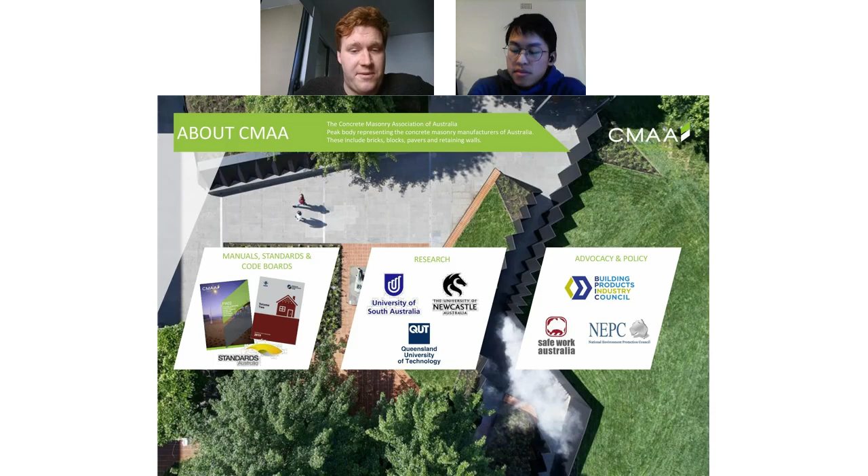We conduct research with numerous universities around the country to facilitate improvement in design and construction within the concrete masonry sphere. And obviously, we advocate for positive change within the industry. So our strategic vision here at the CMAA is to make it easier to build in block and pavers. We have sort of a three-pronged approach to do this.

So we want to develop talent in the industry. So this is obviously through educating our engineers and designers. We want to facilitate important conversations within the industry. So we want to, again, as I mentioned, promote positive collaboration within different spheres and promote healthy conversation within the industry. And lastly, obviously, we represent our members. So we like to promote our members' products as well and make sure that they're used in the correct and proper manner.

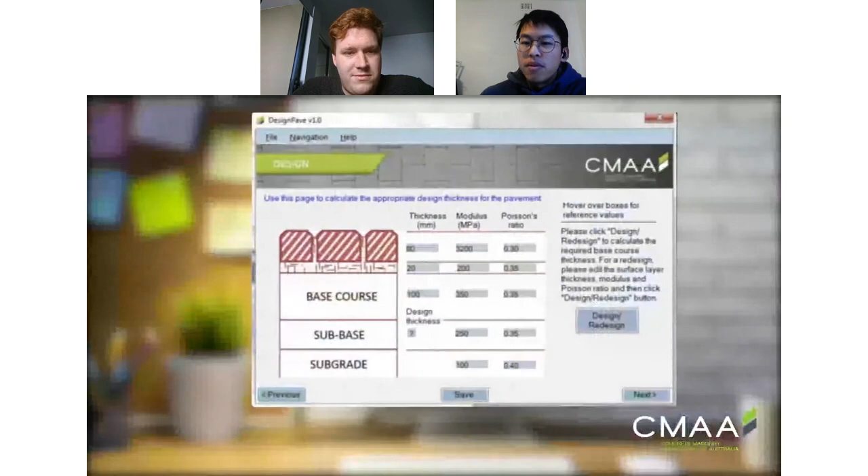And projects your council is interested in with regards to concrete masonry. We also offer our Approved Installer program, which provides training for engineers and paver installers in segmental pavements. Whether they're in-house or subcontractors, the Approved Installer program can help avoid product failure, optimize construction methodologies, and minimize maintenance issues for all matters related to concrete blocks and pavers.

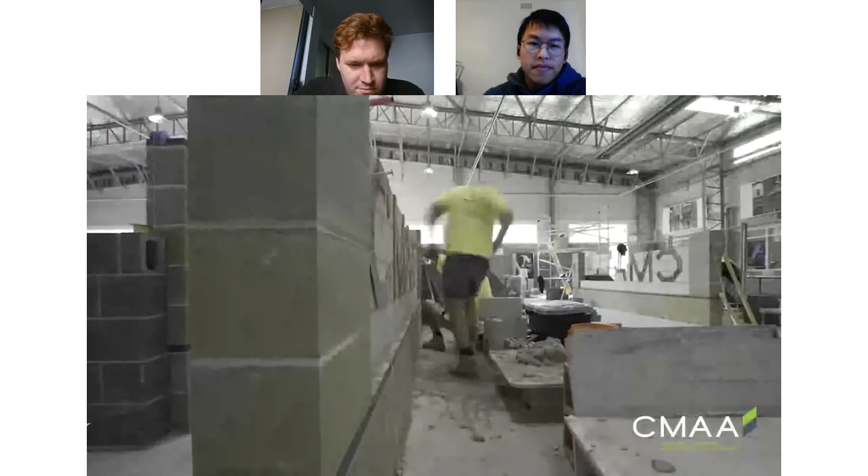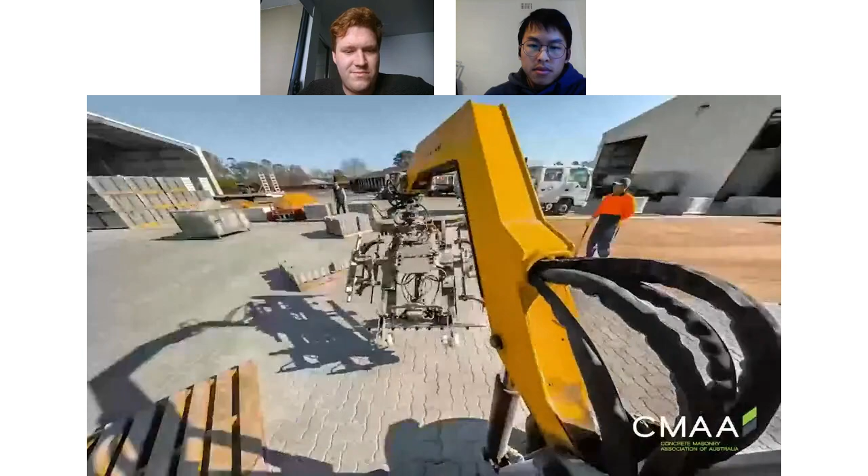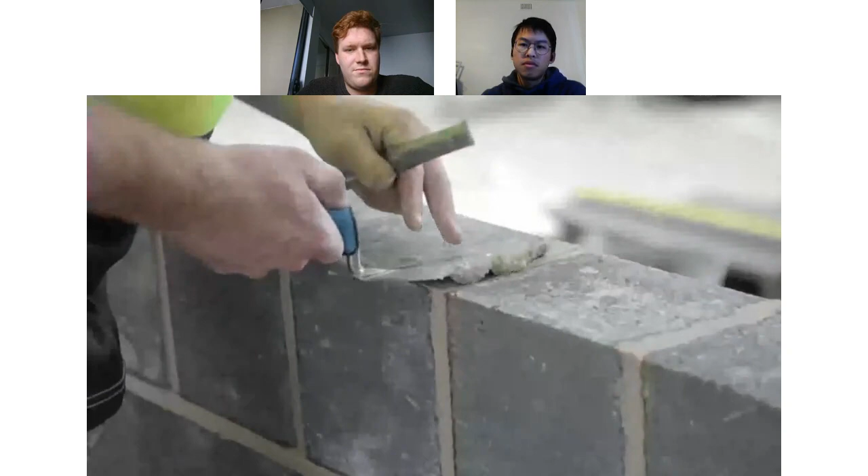Concrete Masonry Association of Australia is an industry association representing concrete masonry manufacturers. Our mission is to make it easier to build with concrete blocks and pavers, which is why we offer all of our services and resources on a complimentary basis to councils. These include our technical services, industry-recognised pavement design software, technical resources, industry networking, technical committees, and our training courses. Our engineers frequently work with masonry products and offer their technical design services to help you effectively manage your projects. We offer industry-leading software tools such as DesignPave and PermPave, which assist engineers and landscape architects in pavement design, alongside live webinars and in-person workshops where we demonstrate how to use the software.

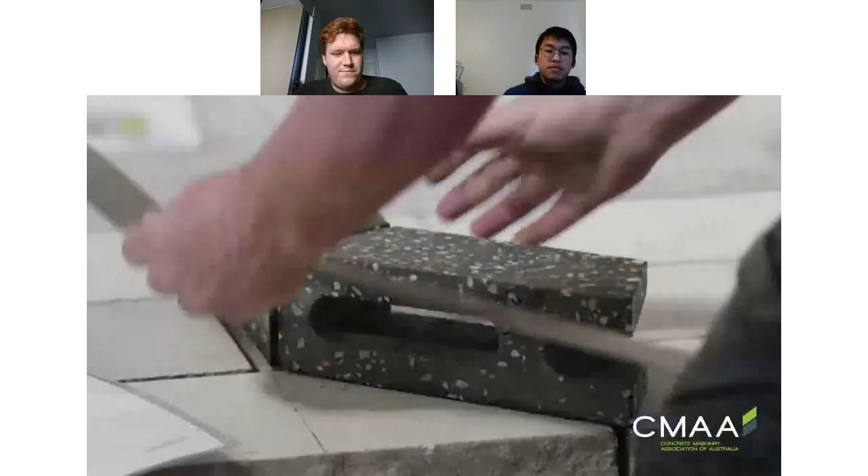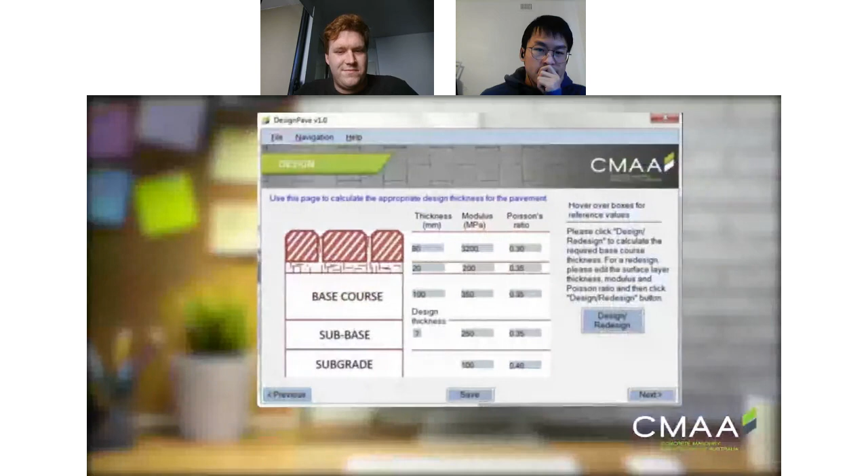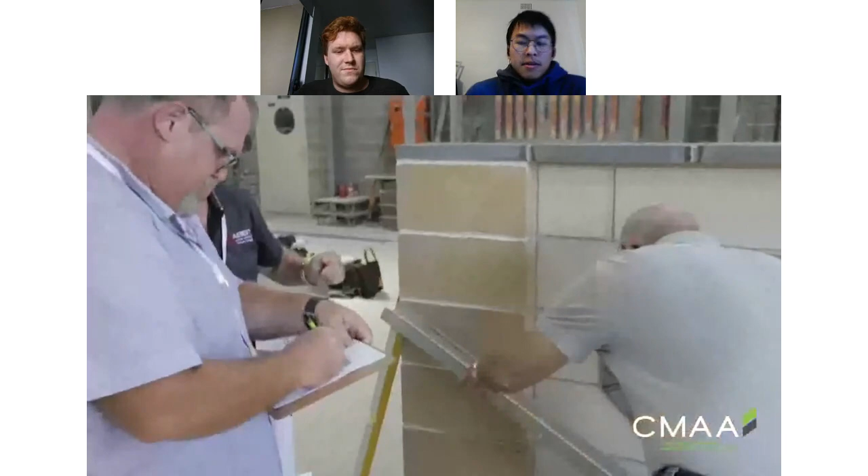We have a range of technical manuals and fact sheets easily accessible from our website to guide your engineers when working with concrete masonry. We facilitate opportunities for you to get in touch with our network of industry members whenever you need to sample their products or receive technical guidance. Another valuable resource is CMAA's Technical Committee, which is comprised of experienced industry practitioners who can discuss any issue in the industry and projects your council is interested in with regards to concrete masonry. We also offer our Approved Installer program, which provides training for engineers and paver installers in segmental pavements. Whether they're in-house or subcontractors, the Approved Installer program can help avoid product failure, optimize construction methodologies, and minimize maintenance issues for all matters related to concrete blocks and pavers. Your trusted source of information is the Concrete Masonry Association of Australia. Our mission is to inform, educate, and provide guidance along the way for councils on a consistent basis. Give us a call today and keep thinking pavers.

In conclusion, I hope everyone enjoyed the video, but I think it sums up what we're about and what you can get out of the Concrete Masonry Association. So again, feel free to ask questions, anything you want to know, we're here to help you out.

So today we're going to go through a little bit about what water-sensitive urban design is in Australia and how we might achieve this. Then we're going to touch a little bit on permeable concrete interlocking pavers, as well as some of their benefits and their applications. Then Jim's going to run through some policies and market development and how this might apply, particularly if you're working in a local government sphere. And then lastly, we're going to touch on some further opportunities, not only for permeable pavements, but also for your concrete segmental pavements in general. And this is going to flow into future episodes of our webinar series as well.

So I might palm off to Jim, and he might take you through a little bit about water-sensitive urban design in Australia. Yeah, thanks, Jack. So to start off this webinar, let's firstly look at what exactly is water-sensitive urban design. We all know that governments, whether it's your local, state, or federal government, they tend to be big on sustainability, not just environmental sustainability, but also social and economic sustainability. And this is essentially what water-sensitive urban design is all about.

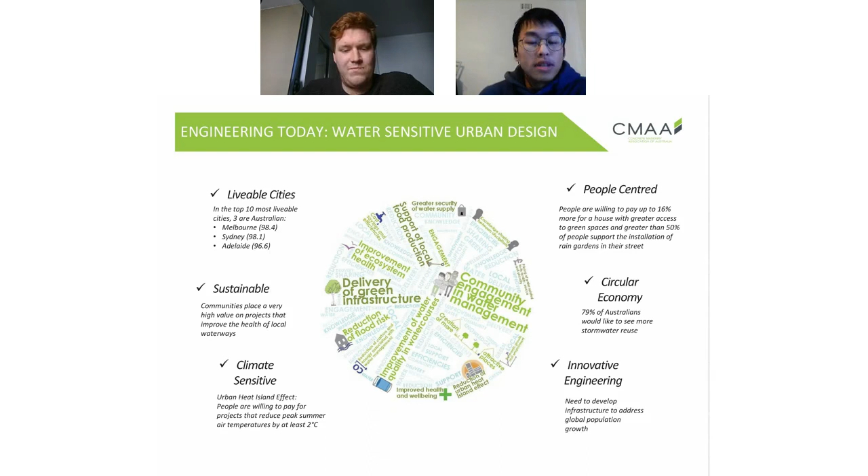One of the big reasons why we need water-sensitive urban design is population growth. Currently, we have a population that is larger than ever recorded and will continue to grow in the coming years and decades, right? And this is going to be a big problem in the 21st century: whether we can provide enough resources to everybody living here.

And this is not unique to water. This also applies to food, to energy. But for today, obviously, we'll only talk about water. Just throwing some quick facts your way. 90% of Australians actually live in urban areas, and 80% of population growth will actually occur in Australia's 5 biggest cities: Sydney, Melbourne, Brisbane, Perth, and Adelaide.

When we think about how we have these densely populated urban centers, the issue not only becomes whether we can provide enough water for all these people, but also whether we have the infrastructure that can help us adequately and sustainably deliver large amounts of water to people living in densely packed places, right? So that's a big issue.

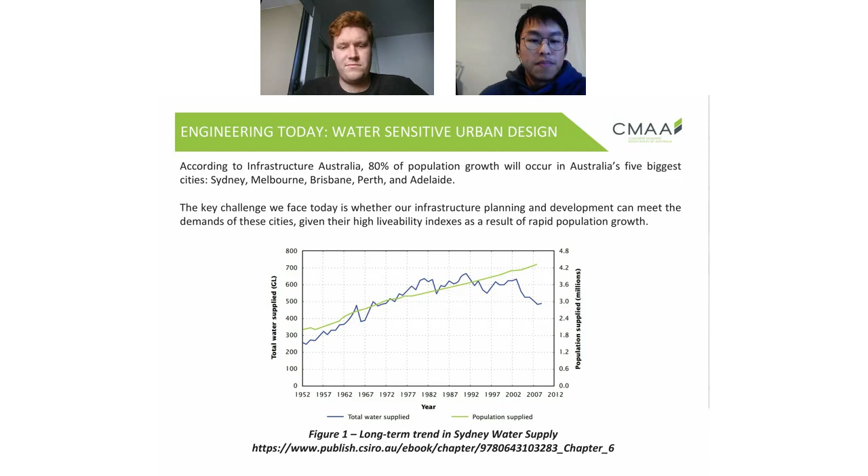Another issue that comes with urbanization and us living in urban areas is the stormwater generated from impermeable surfaces. So to give you an idea of what I'm talking about, when we're out in the countryside, when a big storm comes through and it rains, a lot of that water gets absorbed by the ground. 95% of it gets absorbed by the ground.

When we're in a town or a city where there's a lot of infrastructure, where you have a lot of roads, a lot of buildings with roofs, all these surfaces that prevent water from entering the earth ultimately generate stormwater runoff, right? All this runoff is going to be directed to a drain somewhere down the road.

When you have all this water directed into a small pipe, you're going to have two options. You're going to have to spend a lot of money making a lot of drains, or you're not going to spend enough money, and your areas are going to flood. So this is a big issue that's come from urban areas as well: the large amount of stormwater runoff that's been generated.

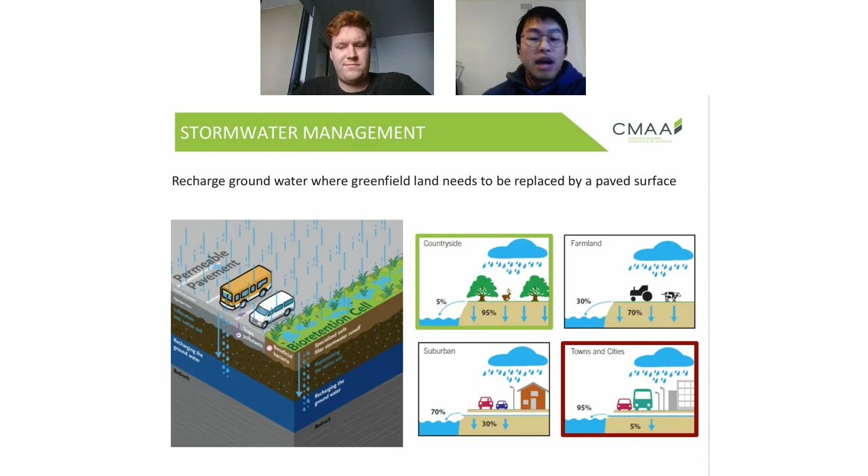And here's just an example of what you might see, right? When you have large areas of impermeability, when water can't get through to the ground.

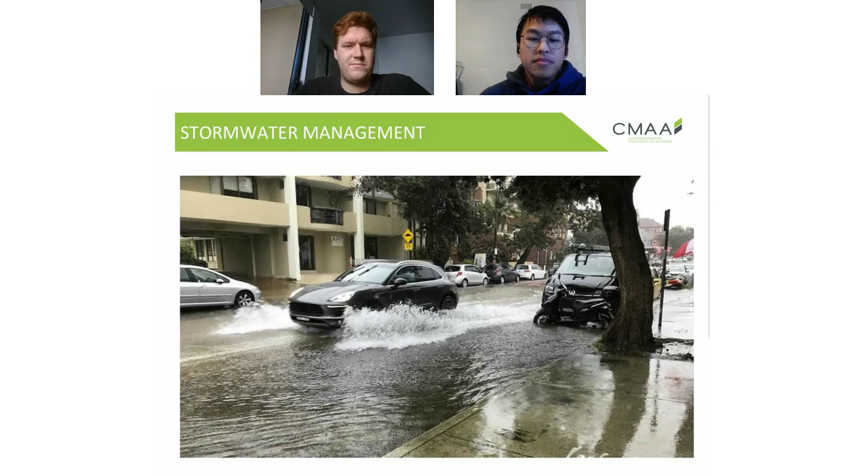Another point I want to make on why water-sensitive urban design is so important, especially in Australia, is because of our climate and our environment. A lot of you probably already know, Australia is known for being vulnerable to droughts. We're a drought-vulnerable country. With droughts, we also become vulnerable to bushfires, which we saw earlier last year. These droughts are a natural product of how our climate doesn't have a lot of rainfall, or at least it has long periods of time without rainfall.

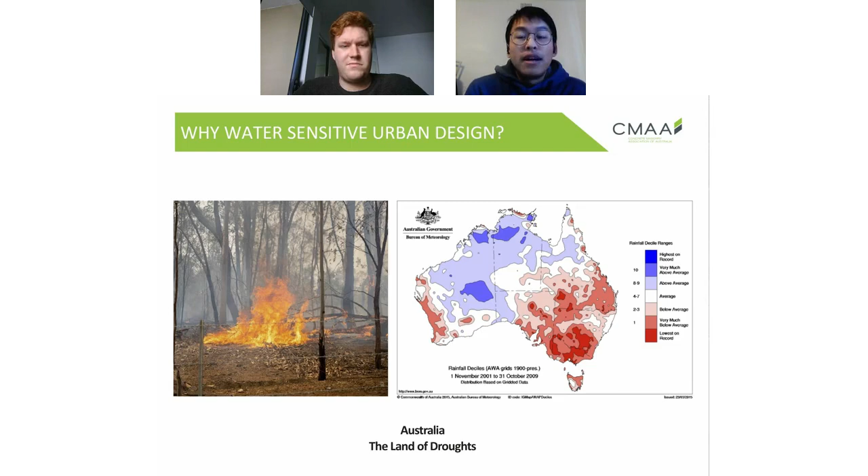But what people sometimes forget is that we're also vulnerable to floods, right? In Australia, we tend to have long periods of dryness, of no rainfall, but we also have short, intense periods of rainfall when they do come. These short, intense storms ultimately cause floods, which we commonly see in Australia, in Queensland, and more recently, earlier this year, in Sydney.

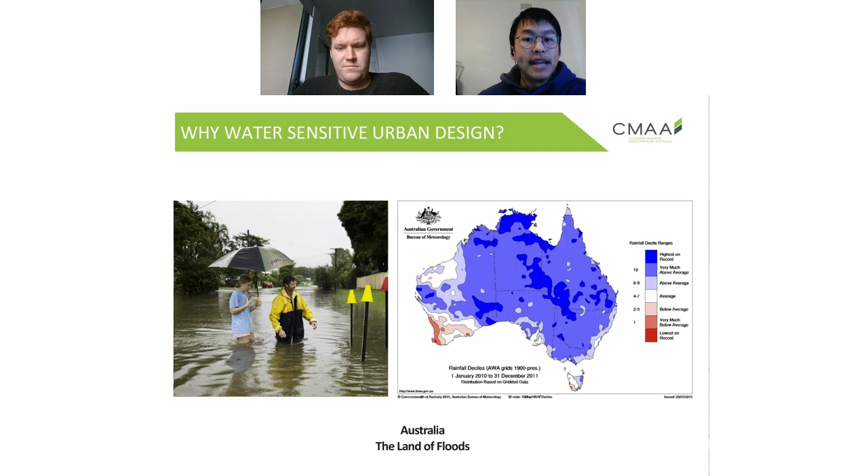So understanding that we're a country that's vulnerable to both sides of the spectrum in terms of extreme events, we really do have to start thinking more intelligently about how we're managing stormwater and how we're building our infrastructure, right? And what the science is telling us is that these extreme events will only become more frequent with climate change.

So as engineers, designers and planners, we need to start thinking about how we are going to build the infrastructure to make sure that we're going to be okay, not just when we don't have enough water, but also when we have too much water. That's going to be a big challenge, and that's something we're going to have to put a lot of brain power towards.

But I'm going to hand off to Jack now. What I've told you is a lot of problems, and Jack's going to talk to you about what solutions might be available. Yeah, so thank you, Jim. So in terms of how we might go about looking towards water-sensitive urban design and some solutions to achieve water-sensitive urban design, what we'd like to specifically focus on today at the CMAA is talking about permeable pavements.

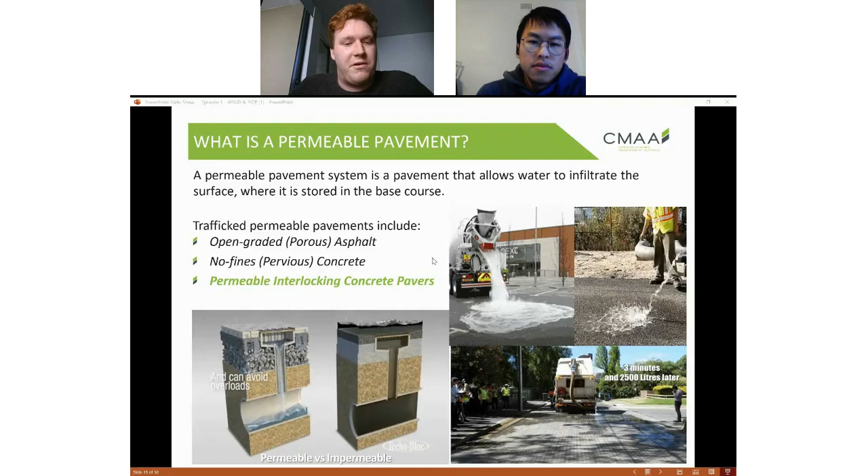So often when we think about water-sensitive urban design and how we might control water, often the conversation steers towards drainage systems, and it steers towards how big our pipes need to be and how large and frequent our drains need to be designed for. But what's often less considered is how the pavement surface itself might react. So today we invite you all to consider looking at the pavement surface itself as a potential solution for water-sensitive urban design, particularly at a local government area.

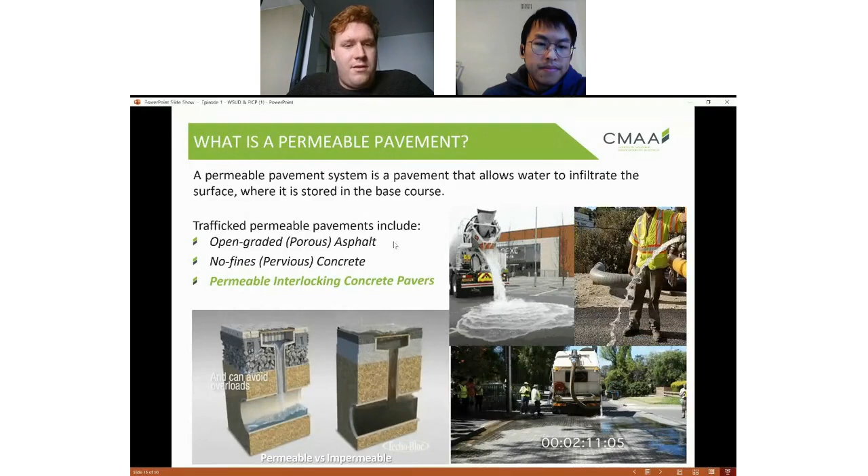So again, what is a permeable concrete interlocking segmental pavement? So essentially, this is going to be a pavement where, as I mentioned, you have small pre-cracked pavers or individual pavers, which will have either widened gaps, as you can see on the left, or actual joints on the right, which will allow water to pass through. Now, the main advantage of these systems in comparison to your no fines concrete and your permeable asphalt is that there's less risk of clogging with these types of pavements.

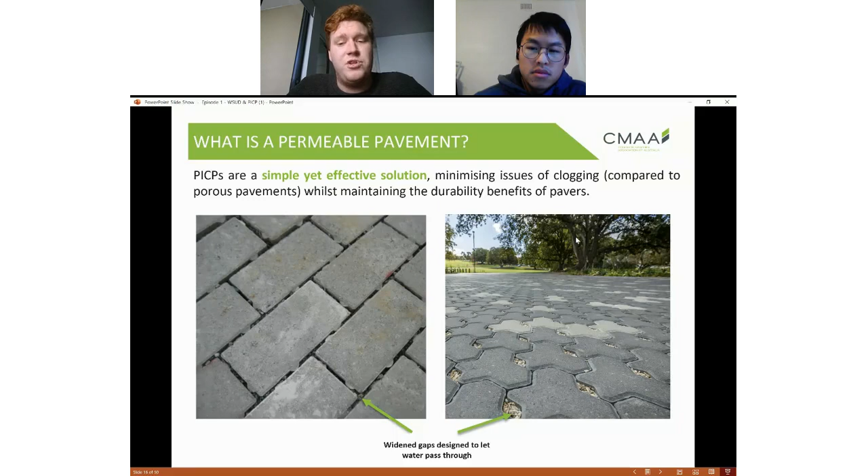As I mentioned before, these permeable interlocking concrete pavers come pre-cracked. What I mean by that is they're obviously in smaller unit sizes than what you might see in your sort of concrete footpaths or bitumen road surfaces. And what this essentially means is that they're less likely to crack on a larger basis than what these other pavement systems will experience over their lifetime.

And a very clear example that everyone here is probably familiar with is looking at a concrete pavement around trees or looking at an older concrete pavement. And all too often, you're going to see these systems have large cracks and large uplifts. And obviously that becomes a huge issue from a maintenance perspective.

Now, again, in the event that these high durable pavers do fail or do crack, it's super easy to replace them. It's a simple matter of lifting the individual paver up and simply replacing it with another paver. Boom, job's done. Again, these pavements are environmentally friendly. So I'll go into a little bit more of the benefits from a water resources perspective in a minute. But it's important to remember that these pavers can actually be recycled at the end of their lifespan.

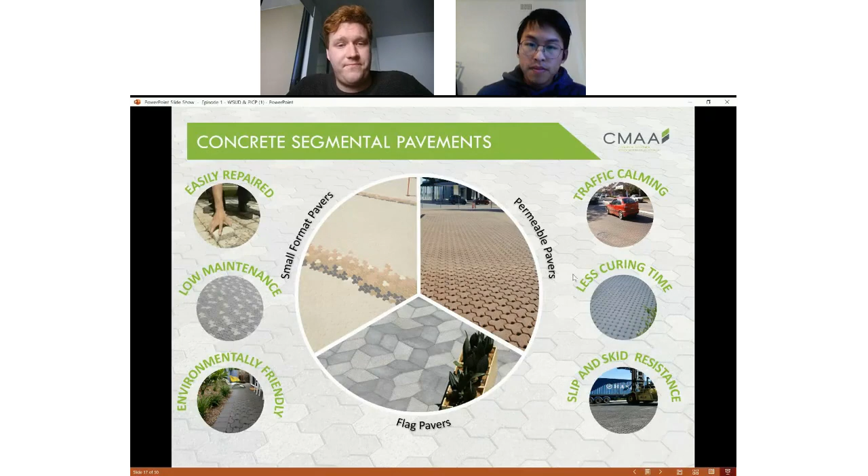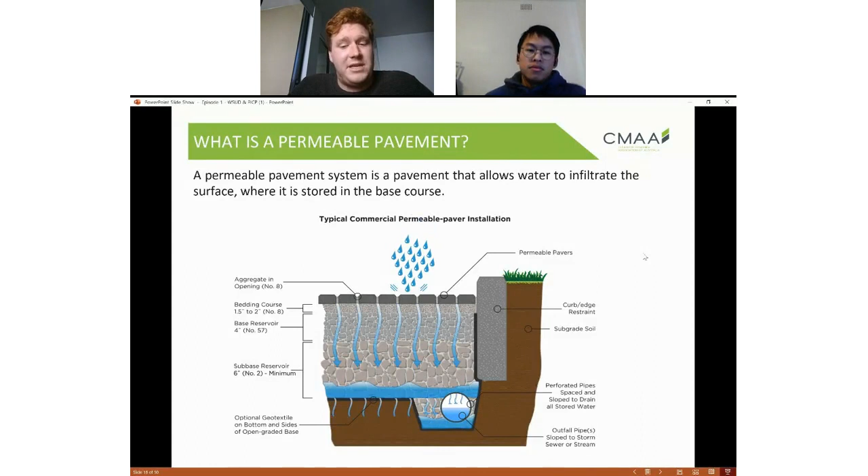But now looking towards specifically how a concrete interlocking permeable pavement system might work. So you can see here in this GIF, the way it works is that rainfall will hit the surface of the pavement and it will actively travel through either the widened joints or the porous pavers themselves. And it will travel through the permeable base course and the permeable bedding course, and run through the system to be stored underneath the pavers. So this water that's infiltrated our system can then either be allowed to go back into the underlying subgrade, or it can be pumped out and reused for whatever reuse water application you might have.

Now, as humans, we're quite arrogant when it comes to urban design, and we like to control our environment and create controlled urban designs and urban situations. However, permeable pavements break the number one rule of pavement design, which is to never let water penetrate the wearing surface of your pavement. And so the ideology here is to work with nature and work with rainfall and allow it to actively flow through the surface as it would in a non-urban situation.

Now, we often hear concerns about water infiltrating the surface of your pavement. And this is often because engineers are concerned that when water gets underneath the pavement, it's going to create a pumping effect whereby a lot of the fines in the underlying base course are removed through the erosive force of water. However, if we think about how we can design these pavements, we can actively combat this situation.

And so remembering that urban traffic is extremely destructive, that water can be a powerful eroding force, and that having a saturated pavement alters the material properties, we can try and think of some solutions to combat these to create our permeable pavement system. And what we end up with is a no fines base course, which will allow water to filter vertically through the base course whilst not having that erosive force that you would otherwise experience with an impervious surface. So by acknowledging these potential flaws and addressing them, we can have a pavement that will perform both structurally and hydrologically.

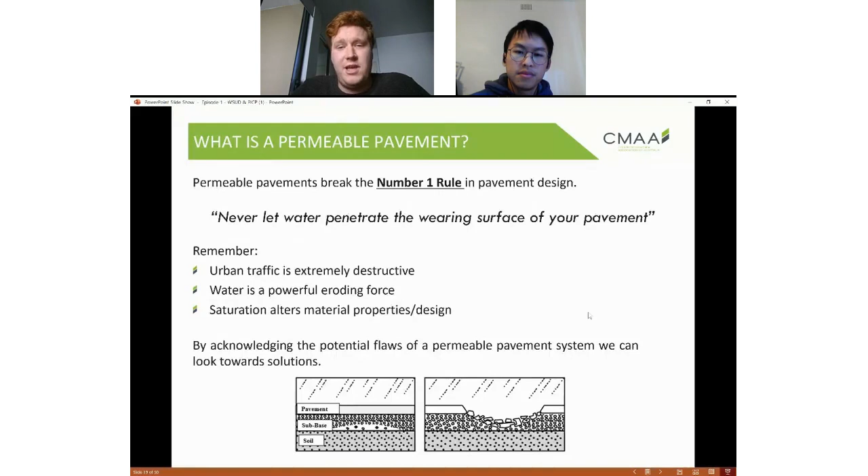So how do these work? In terms of benefits and systems for permeable pavements, there's three main systems that you might want to consider with your hydrological design. The first is runoff control. As I mentioned before, permeable pavements are going to allow water and rainfall to infiltrate the surface. And you can see here through these two little GIFs how impervious pavements versus permeable pavements might work.

In an original situation with your typical impervious pavement, your rainfall would hit the surface, flow into a drain or a pit, and flow through the stormwater system. Essentially the inflow would be equal to the outflow immediately throughout the duration of that storm. What a permeable pavement aims to do is extend that hydrograph. You can see here on the bottom left the idea of having a permissible discharge in your system, or having certain infrastructure to allow a certain discharge.

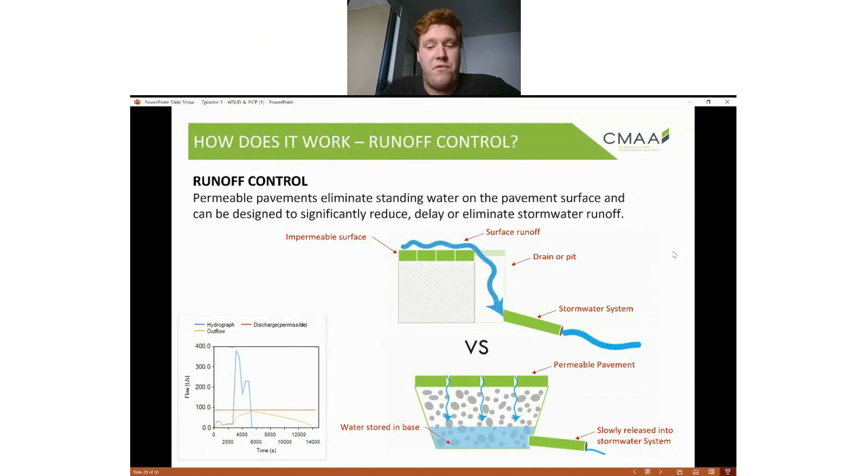The aim of these permeable pavements is to store that water over a longer period of time so that your outflow doesn't go higher than your discharge. In layman's terms, this means that you won't have flooding in your system because you will have the capacity to store, mitigate and remove this stormwater slowly.

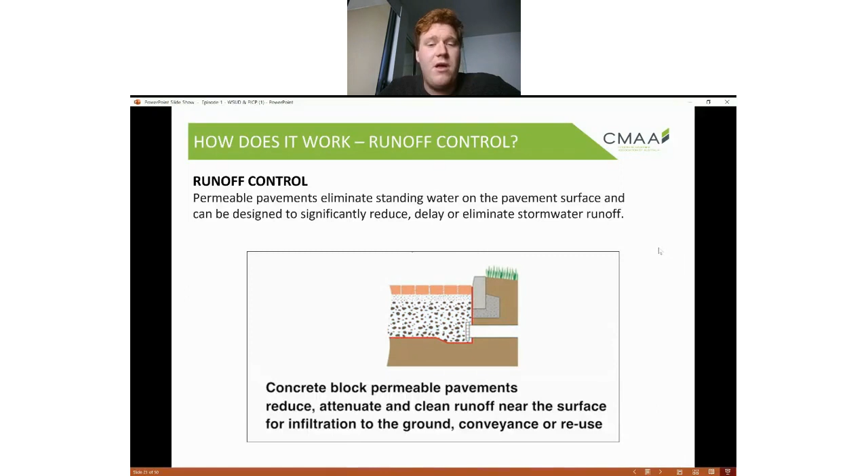And again, you can see how this works in this video as well. You can see rainfall slowly infiltrating the pavement surface and filling up in the base course, where it is slowly released either through a pipe or into the underlying subgrade. What this means is that you won't get standing water on your pavement surface. The photo that Jim showed before of the road being flooded from heavy rainfall, with a permeable pavement system, you won't get that.

Now, the second main benefit for permeable pavements and a secondary system requirement that you might consider is water quality improvement. What do I mean by this? When water hits our pavement surface, it's going to take with it all of the pollutants on that surface, including phosphates, nitrates, and suspended solids. A permeable pavement will actively filter out these pollutants. It's quite simple in theory: it's essentially gravity-fed mechanical filtration.

The water will enter the pavement through the gaps that I mentioned before. As it bounces around and hits the aggregate within the bedding course and the base course, those pollutants will stick to the aggregates and get filtered out as the rainfall infiltrates downwards. So you get a stone reservoir mechanical filtration system, whereby your phosphates, nitrates, and suspended solids are stored in the bedding course and the base course, and clean water is released at the bottom of your pavement system.

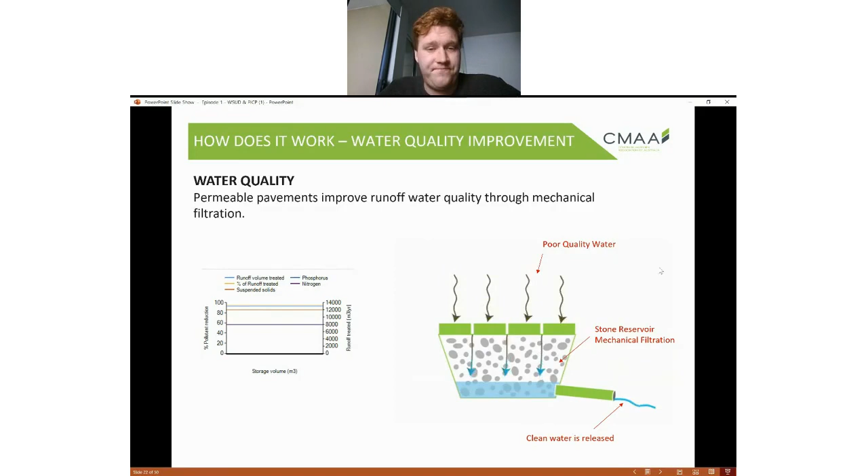Lastly, we've got water harvesting as something you might want to consider with regard to water-sensitive urban design and the design of permeable pavements. As I mentioned before, water can be stored in the base course of these pavements. Seems pretty simple. You can design your base course to be large enough in volume to store a certain amount of water, depending on your climate zone, how much rainfall you receive, and how much rainfall you want to reuse for later applications.

A great example of this is having a permeable pavement in a car park for a sports oval, because you can capture all of the rainfall that hits the surface of this car park and use this water to water the grounds of the oval. From a local government standpoint, this is great because it means that you don't have to pay for water to irrigate these areas.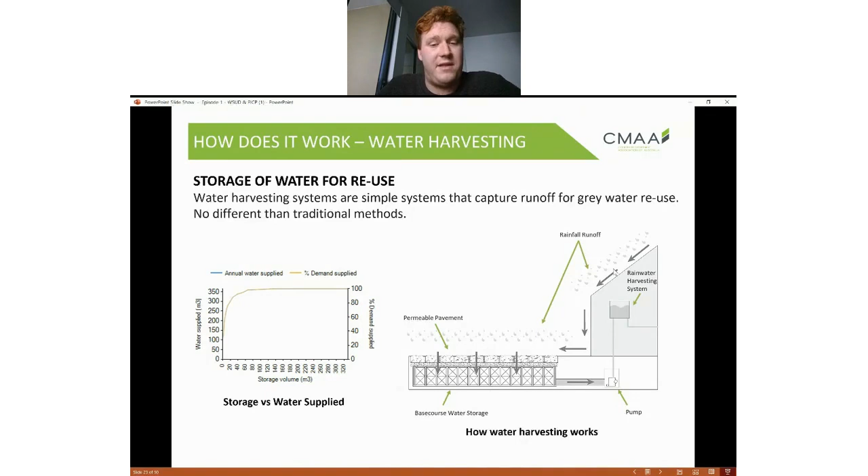So to sum up some of the main systems and some of the main applications of permeable pavement systems, obviously from a water-sensitive urban design and sustainability standpoint, we can look at flood control. These pavers are going to mitigate the risk of flooding as they will store water in the base course. Additionally, the stored water in the base course can be reused, meaning that it's not going to waste. And you're also improving your water quality as well, meaning that pollutants aren't going to make their way into the stormwater system in the first place.

Now, if we're talking about economic benefits as well, you don't actually have to put drainage infrastructure into a lot of your permeable pavement systems, particularly if you're going to let the water infiltrate slowly into the underlying base course. You don't even need a pipe, you don't even need a pump for this water, which actually minimizes the need to design and construct drains and pipes.

Again, property protection: minimizing the risk of flood means that properties are often safer, and you're going to be maximizing your land use and how sustainable your area is going to be with these permeable pavements. So in short, combining all of these benefits, it's realistically a multifunctional, holistic pavement solution that you're going to be able to employ, particularly to reach those targets for water-sensitive urban design.

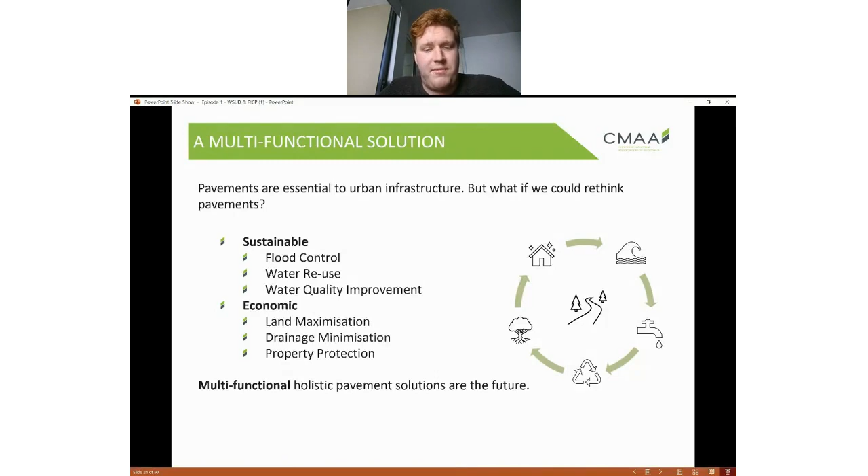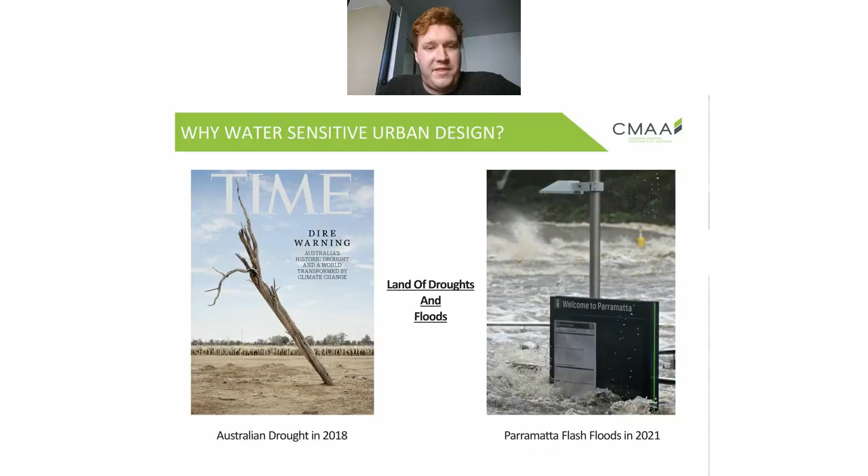So I think I might hand over to Jim now, and he might go through some of the benefits of using our DesignPave and PermPave program. I think we no longer need the GIFs, so we're going to switch back to regular slides on Demio now. I'll let you take it from here, Jim. Yeah, let me just fast forward.

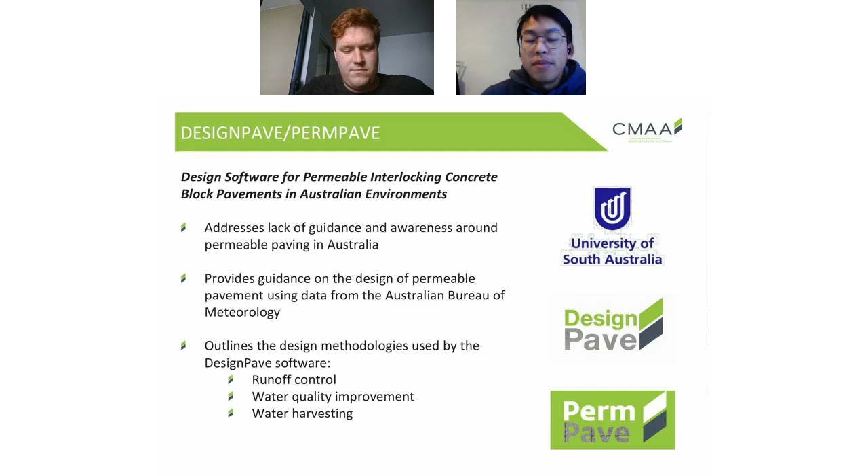So if you're wondering how exactly you would design a permeable pavement, we've got you covered, because we here at the CMAA, in partnership with the University of South Australia, have actually developed a software program to help you do exactly this. These are the DesignPave and PermPave programs, DesignPave being the structural part of the program, and PermPave being the hydrological side. DesignPave and PermPave is quite unique in that it's the only program in the world for permeable interlocking pavers.

I'm just going to give you a quick rundown as to how the program works. The point of today is not to overburden you with a lot of technical information, but to give you a high-level understanding of what exactly permeable paving is and why water-sensitive urban design is important. So to put it in really simple terms, we're going to use the bucket analogy. That's all a permeable pavement is. It's just a fancy bucket with a hole at the bottom, right?

So when a big storm comes through, instead of your stormwater system instantaneously being subjected to a high amount of water, what you have is a temporary water storage solution to hold that water and, over a longer period of time, release it at a constant flow that you as the designer have specified.

Your pavement can be modified in all sorts of ways: through changing your paver type, your base course material, or the subgrade you're actually building on. And you can change and customize all these inputs in the program. That's essentially changing how big your bucket is, how deep your bucket is, or how big the hole is at the bottom of your bucket.

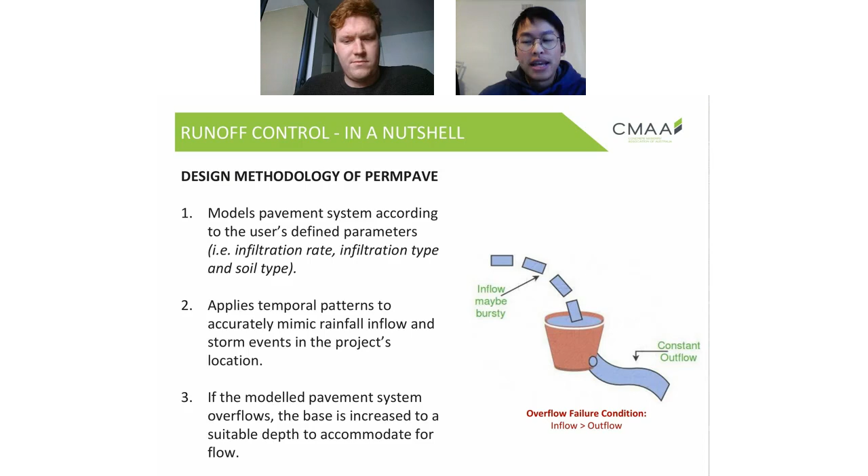Runoff analysis is only one section of the program. There's also the water quality and water harvesting sections of the program as well. And we've got some screenshots there, as well as the DesignPave component, which I mentioned earlier. And the DesignPave component, again, is the structural side of things, analyzing your pavement and seeing how many axles or how many vehicles your pavement can actually withstand.

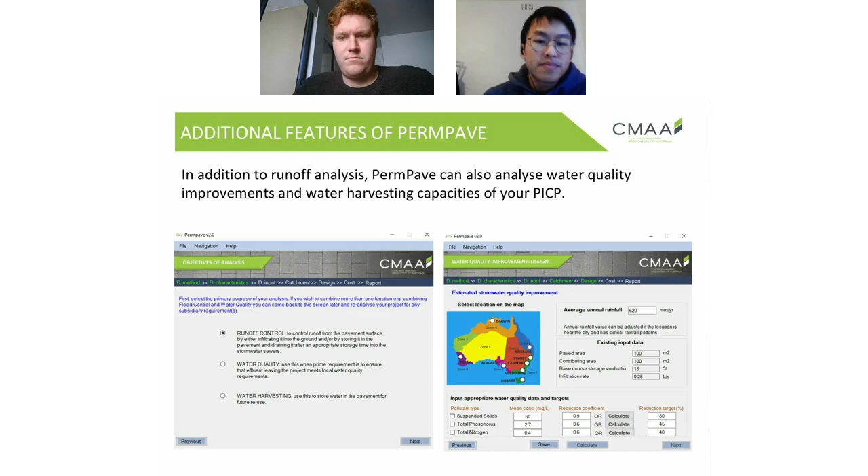And again, PermPave and DesignPave is quite unique in being the only structural and hydrological design software in the world for interlocking concrete pavements. And it's also unique that it's specific to the Australian climate. And the aim of why we developed this software is really to make designing pavements easier for you. Designing interlocking pavements and permeable pavements by hand is quite a long process. With DesignPave and PermPave, you can achieve that easily with a click of a button.

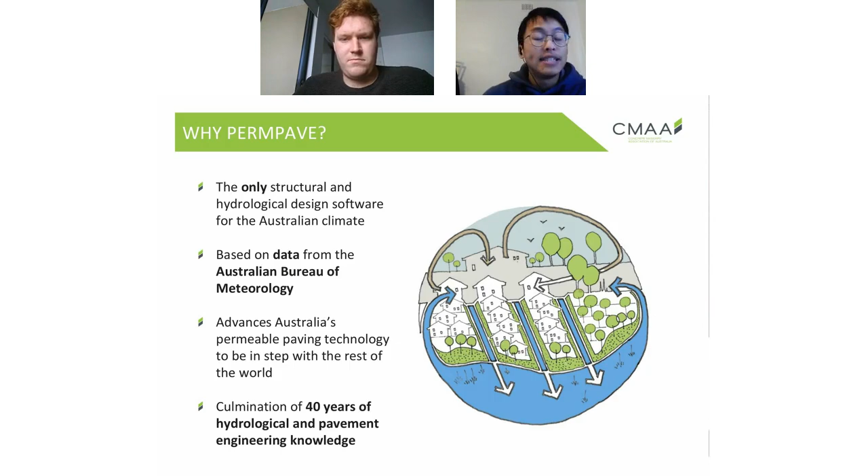I'm just going to quickly run through policies and market development, having a look at where we are currently in the world and how we compare with some other countries when we're talking about permeable paving. So permeable interlocking concrete paving actually first emerged in the 80s, with Germany being the first adopter of this technology. During that early time, a bunch of other countries adopted the technology as well: countries across Europe, South Africa, USA, and Australia as well. Australia was actually one of the early adopters of the technology. We've since fallen behind the rest of the world a little bit, and I'll get into why that has happened in the next couple slides.

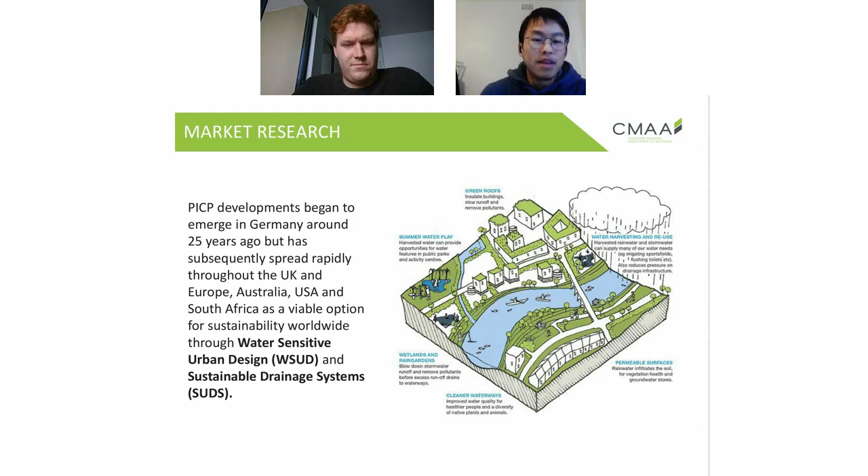Just to keep in mind, with water-sensitive urban design, when you might be looking for technical resources, you might notice that everything's applicable to Australia. All the resources are from Australia. That's because water-sensitive urban design is just the name that we've given it here in Australia. It has different names in other countries as well. In the UK, it's called sustainable drainage systems, for example. So just something to keep in mind.

Germany's arguably the most advanced country in terms of its adoption and support for permeable interlocking concrete pavers. One reason is because it was an early adopter. Another reason is because the government has really had a proactive role in encouraging the replacing of impermeable pavements with permeable pavements. And how they've done this is actually quite smart. If you own property in Germany, you'd usually have to pay a stormwater fee to help upkeep any stormwater assets that your government would own.

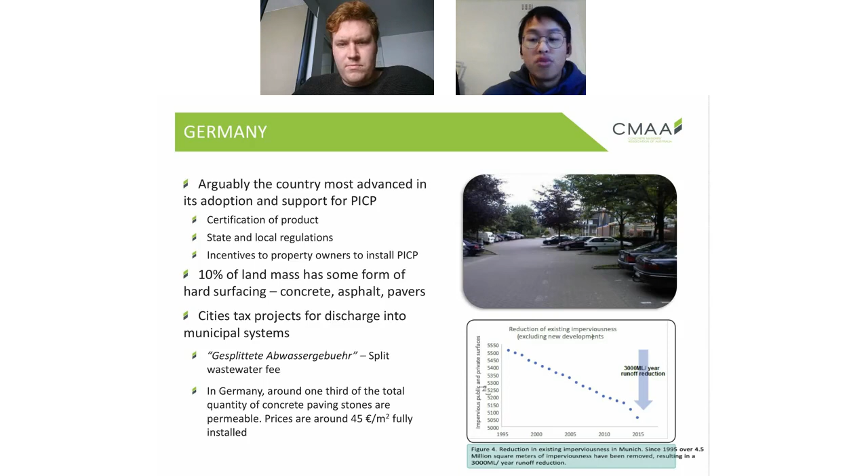In Germany, this stormwater fee is variable depending on the area of permeable paving that you would have. If you have a large impermeable surface, that would obviously generate a lot more surface runoff than a permeable surface, and the stormwater fee takes that into account. So if you have more permeable surfaces, then you have to pay a lower fee. And that's been a key part in driving down the impermeable surfaces in Germany and driving down that runoff as well, as we see at the bottom right graph. And again, Germany's quite good in this respect, and 2/3 of all permeable pavers in Germany are used in engineered pavements.

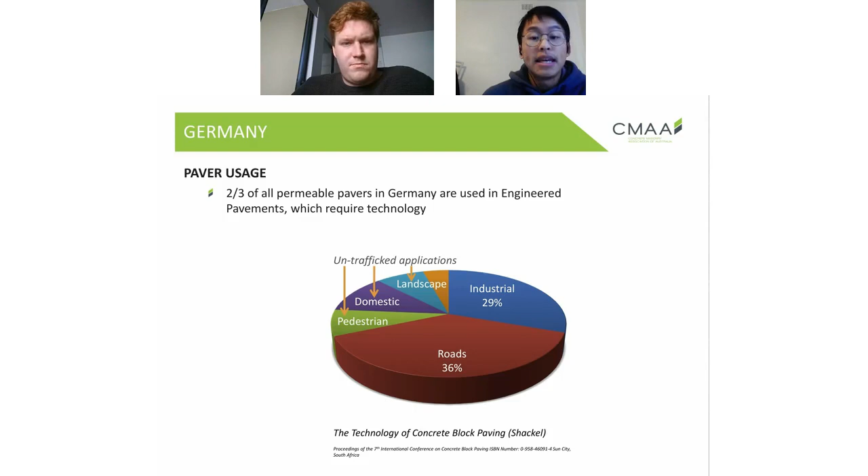Moving on to the Netherlands, not quite as there as Germany, but still fairly good, with 1/3 of all engineered pavements being permeable. The thing about the Netherlands is they are a flood vulnerable country with a lot of their land area under sea level, and the government has actually invested a lot of money into flood risk mitigation. So if we were to learn from them and look at what they're doing, seeing how they've adopted permeable pavements, that really is a lesson to be learned.

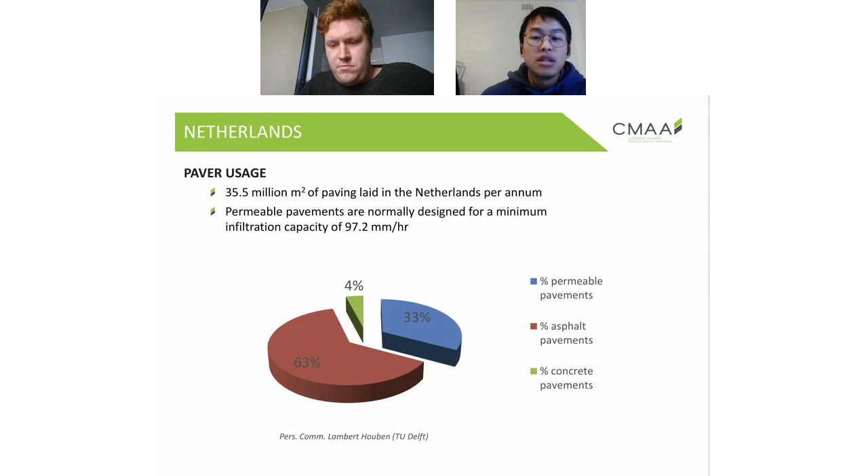Moving on to the UK, one good thing about the UK is they have their own equivalent of CMAA, and that's the Interpave Association. So they're essentially the British version of us. They're really good because they've worked really hard to develop the technical resources to help people design permeable pavements accurately. A lot of the times, people might not necessarily know how to design and construct them properly, and providing the guidance for that is really key.

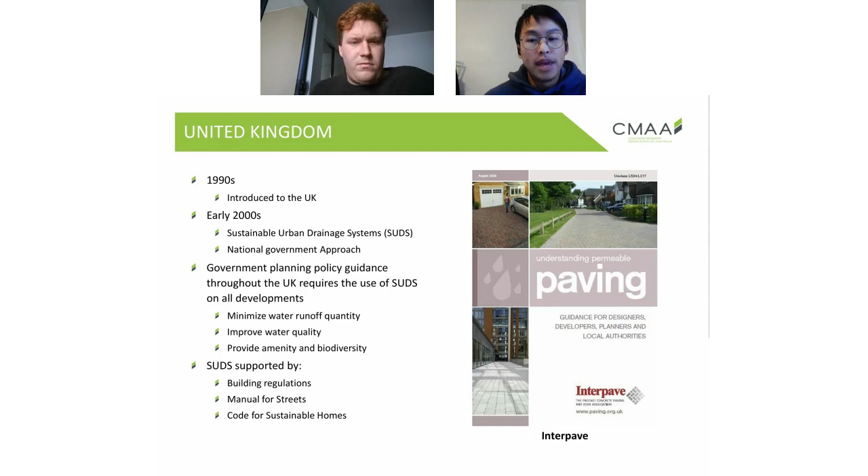Another key part is that the government policy guidelines have actually encouraged permeable paving a lot as well. If you were a developer in the UK and you wanted to build a car park, for example, outside a shopping mall, if you wanted to use permeable paving, no problem. You can go right on ahead. If you wanted to use impermeable paving, however, then you would have to justify and provide reasoning for why you're using impermeable paving. And that, again, has really encouraged the adoption of permeable surfaces.

Similarly, the United States also has an American association, the ICPI, which is just the American version of CMAA. That has been a key part as well in providing and educating the industry on how to design permeable pavements. They've also had a lot of really good government policies and agencies in pushing towards more sustainable stormwater management.

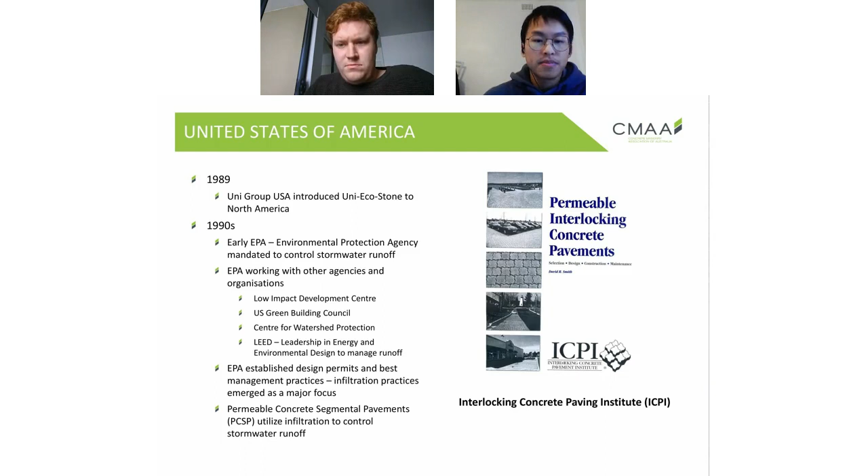What you might have noticed with the countries I've just talked about is that a lot of these countries have a top-down approach, right? Australia is a little bit different in that we have more of a bottom-up approach, where it's really up to the designer to convince people to use permeable paving. And this is one of the bigger reasons why, even though we were an early adopter of the technology, we've fallen behind since then.

In Australia, generally speaking, though it does vary state from state, it's your local governments who manage stormwater and who own those stormwater assets. So at the end of the day, it's really up to the local governments, it's up to their discretion to see how they want to manage that stormwater, whether it's through drains or through permeable paving. We've seen a few councils who are really proactive and really enthusiastic in adopting permeable paving projects, a few in South Australia, for example.

And more locally for me, actually, in New South Wales, in the locality that I live in, Ku-ring-gai, the council actually offers rebates depending on what type of water harvesting systems you might have. And permeable paving does fall under that rebate program. But for a lot of councils, permeable paving doesn't seem to be on the radar. Part of that might be because they might not know how to design permeable paving. It might be a little bit scary, but that's what we're here for, right?

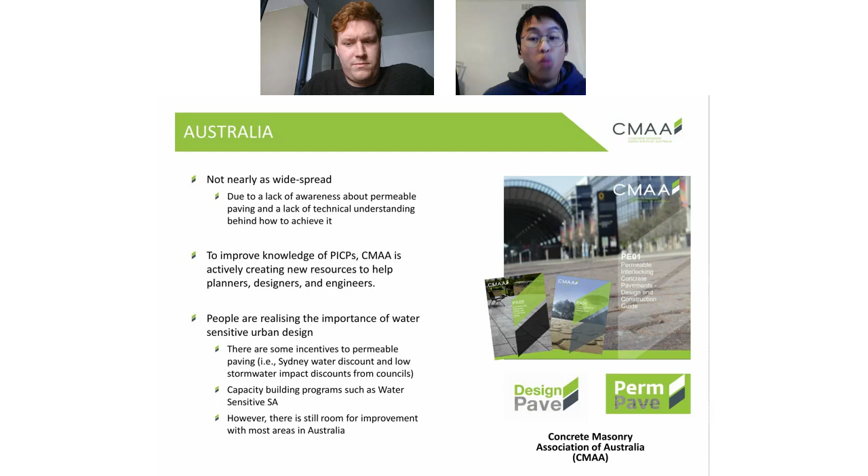Just before I hand off to Jack, I just want to finish off on probably one of the most famous permeable paving projects in Australia, and that's the Sydney Olympic Park. And what a coincidence with the Olympics happening now. Sydney Olympic Park, built over 20 years ago, has large areas that are permeable, right? And it was really quite innovative for its time. The fact that it's still standing today and still looking as sharp as ever is a testament to how durable and how versatile permeable interlocking concrete pavements are.

And the notion that permeable pavements are weaker or might not be as versatile is just not true, right? If you've ever visited Sydney Olympic Park, what you might also notice is that there's actually a lack of drainage infrastructure. And that again goes back to how permeable paving can reduce your need for pits and pipes. Especially if you're in local government, pits and pipes are incredibly expensive to build and install. And more importantly, when you inevitably need expansions to your stormwater systems, they're incredibly expensive to expand for growing populations as well.

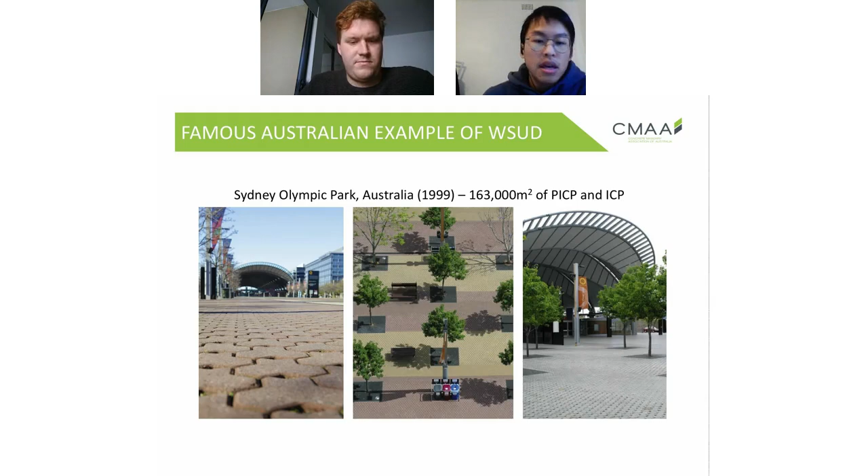Now I might pass off to this last section, pass off to Jack and talk about some further applications of permeable paving. Yeah, thanks, Jim.

Just before I get into this section, it's great to see we've had some really great discourse in the chat here. I probably should mention Keanu, one of our pavement engineers here, is in the chat answering some of your questions, and there's some great questions in there.

So yeah, David and Martin both asked about pollutant saturation and whether this can be an issue with clogging in pavers. So as Keanu's mentioned, pollutant saturation does generally occur over a 10-year period and is about 10% of the effectiveness. The other thing that's worth considering as well with regard to which system you might want to use and which one is more consistent or clogs less frequently is the idea of maintenance and sweeping. So at the CMAA, we do recommend sweeping every 6 to 12 months of these pavements, and that can exponentially expand the lifetime of these pavement systems.

The other thing that's worth considering as well, just as Jim's talked about DesignPave, particularly Permpave, it does take these factors into account with the infiltration values of the specific types of permeable pavers as well. So it actually uses more conservative values for these pavers, which takes into account the potential clogging that can and naturally will occur over an extended period of time. However, the clogging can be combated with this regular sweeping. And you can see this through the Sydney Olympic Park example that Jim's just taken us through really quickly.

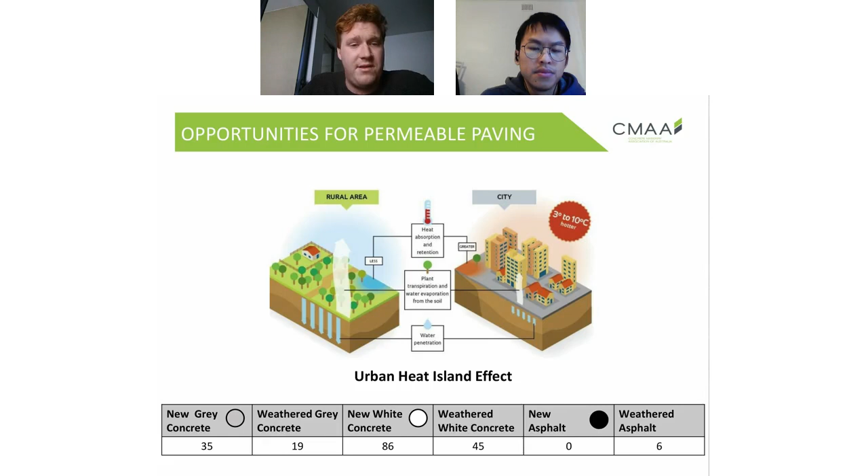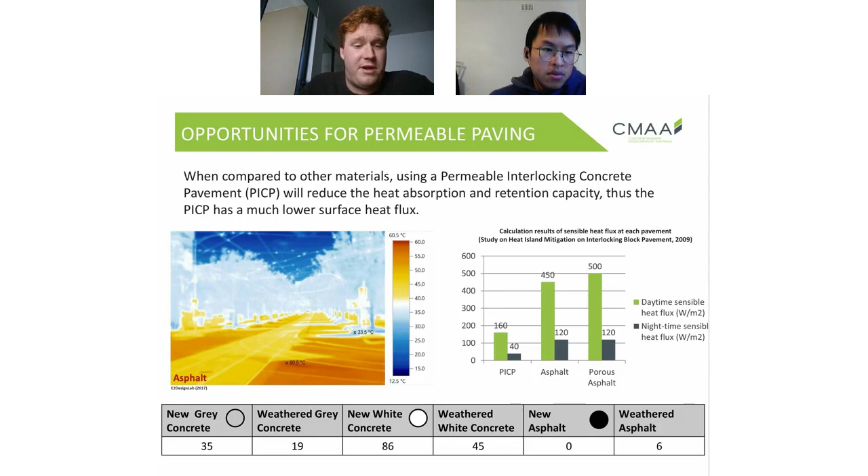Again, as I mentioned at the start of this webinar, the idea of traffic calming also comes into play. And this is relatively specific to your concrete interlocking pavers. Because they are pre-cracked, it's going to create additional friction and additional vibration through wheels driving on top of these pavements. And so what that's actually going to do is encourage drivers to slow down, which makes these pavers really great for areas where you want low-speed traffic.

Obviously, this is going to include your car parks and school zones, but more and more, we're also seeing shared zones pop up in urban planning. So in terms of where you might consider permeable concrete interlocking pavers, if you're in an area where you want these lower speeds with your traffic, then definitely this is worth looking at as well. And again, we'll get into this in further detail in future episodes.

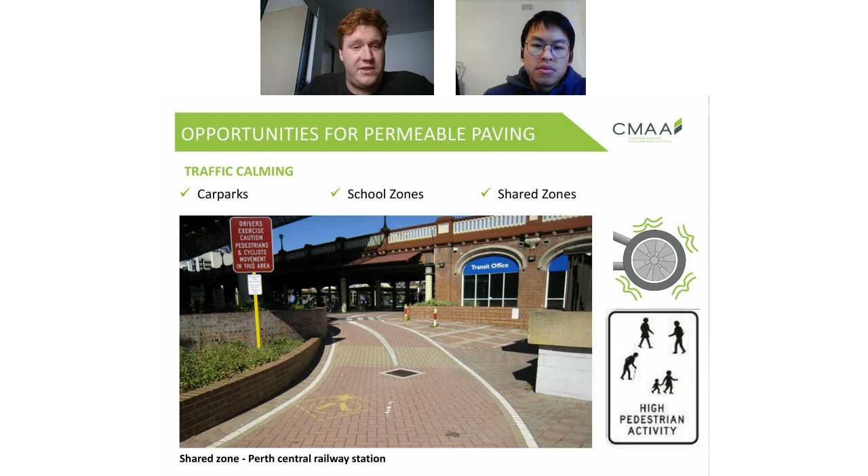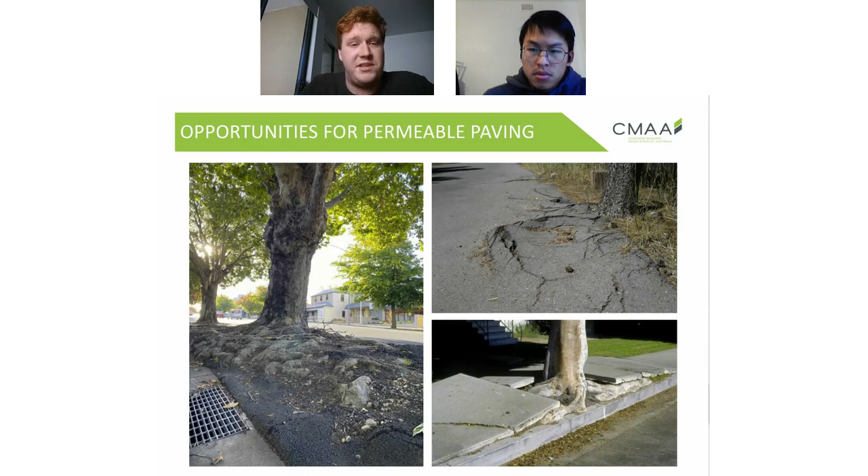And another massive issue, probably one of the largest issues for engineers in local council, is the idea of tree root uplift. As tree roots grow, oftentimes they're actually going to grow towards the surface to chase additional water and nutrients. And the current issue that we see is that in impervious surfaces, the water isn't allowed to infiltrate below the pavement surface, meaning that the underlying subgrade is not getting the required moisture and nutrients that a tree will need to grow.

So what ends up happening is the tree goes in search of this moisture and nutrients. Sort of makes sense. They're chasing their nutrients and their food. And what you see here is these tree roots growing upwards and eventually cracking your pavement surface. Now, what a permeable pavement will do is actively allow this moisture and these nutrients to go down into the underlying base course and then eventually subgrade.

And this is going to encourage trees to put out those initial fibrous roots deeper into the root structure, which will then turn into your heavier woody roots that you'll see, particularly with your larger trees. So you can see a really great example. This is with juvenile trees, but you can see how using permeable pavements will encourage these tree roots to grow deeper and deeper as the life cycle of the pavement goes on. And once again, we plan on doing a full episode talking specifically about tree root uplift.

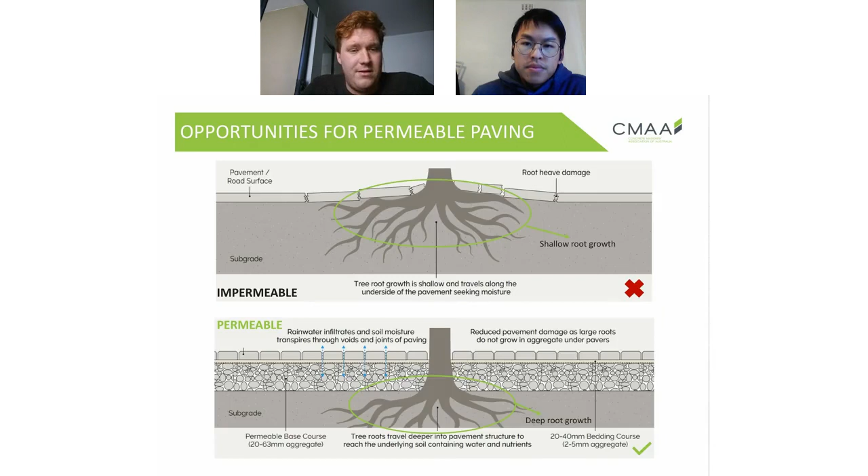All right, I think, Jim, if you want to take it away from here.

In conclusion, obviously we see that water-sensitive urban design really is needed in Australia, not just because of our climate diversity and how we're prone to different sort of extreme events, but also because of the issue of population growth and urbanization. And we really need to start thinking intelligently about how we're going to develop the infrastructure to support

these growing populations. Permeable paving is a really fantastic part of how you might be able to achieve water-sensitive urban design. It has a lot of added benefits, such as stormwater management, as well as the ones that Jack talked about earlier, urban heat island effect, tree root uplift, and water quality improvement. But at the end of the day, what we'd like to see most as an industry association is to see local governments and consultants really start to think more proactively about permeable paving projects.